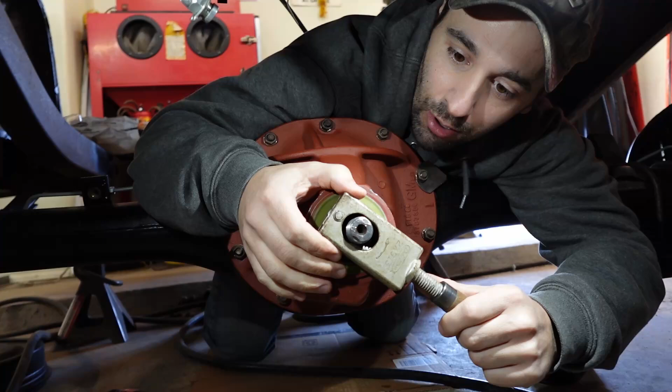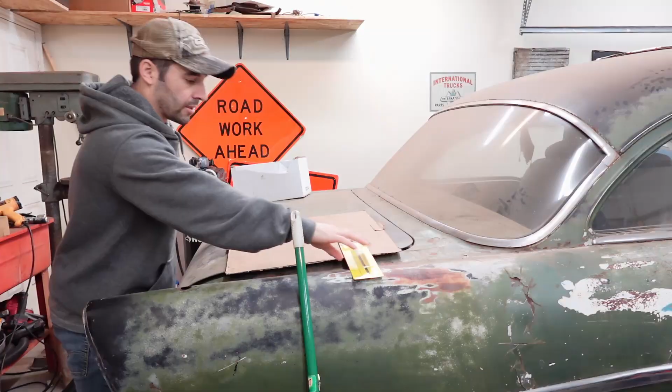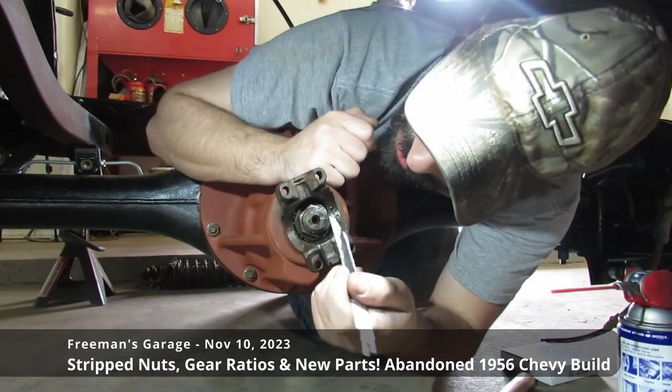We're working on the 56 Chevy again today, and I'm only concerned about doing one thing on the car today. In more than one previous video here on Freeman's Garage, we tried to fix the jacked up threads on the pinion gear on this 56 Chevy, and I think we're finally going to be able to fix it this time with this thin little hacksaw blade.

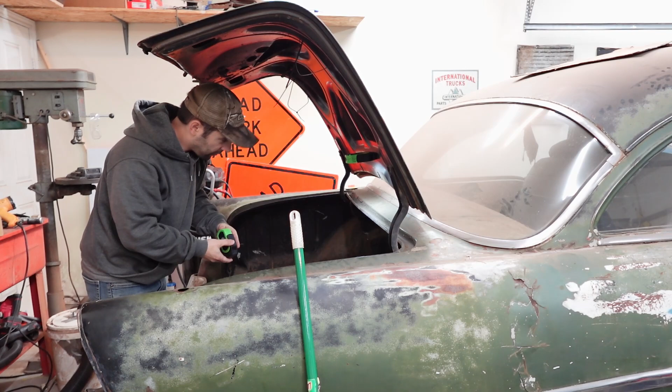Hopefully. There's multiple projects going on here at Freeman's Garage all at the same time, which can add to the confusion and chaos of getting things done, sourcing parts, and keeping things in order. And on top of all that, I take a road trip over Christmas all the way across the country and back.

And of course I just can't help myself. I end up in the swap meets and the estate sales, and I'm buying things. I really did need the kitchen cabinets for Freeman's Garage. I really did need those. I can't help it, I'm a collector.

But now on top of everything I've got going on at once, I've added in sorting through and organizing all the junk - really good items I brought home. Useful, needed, good purchases. And I'm going to be hanging cabinets and all that kind of stuff.

And so I figure, I need to keep things going, I need to keep the 56 going. I can't stop for a week or two and do all that kind of stuff. So let's take this time we have right now and get the one thing done that's really clogging things up at the moment, and fix these threads, finally get our pinion nut back on, and that will relieve - I think that'll blow up the dam and get things moving again.

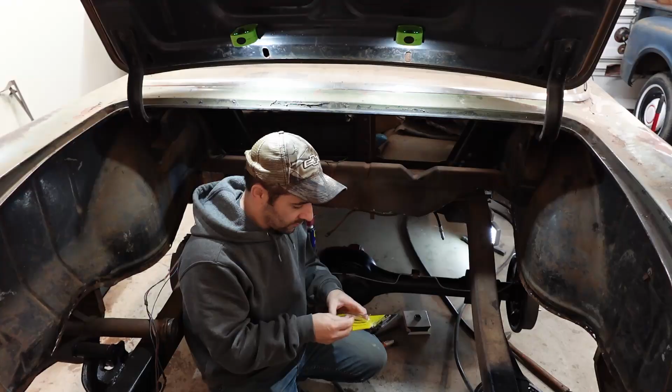So hopefully, this thin little blade is going to do the trick.

Now, where is the... here's a Sawzall blade that we were trying to use in one of the previous videos. Is this really any thinner? You'll see why we need a really thin blade here in a second, especially if you haven't seen those previous videos yet. Oh, this is a lot thinner than this Sawzall blade.

So this might do the trick. And I bought 2 packs of these blades, and they were 89 cents a pack for a 2-pack. So hopefully they don't just fall apart as soon as we start filing. Hopefully they last. All right, so here's the scene of the crime.

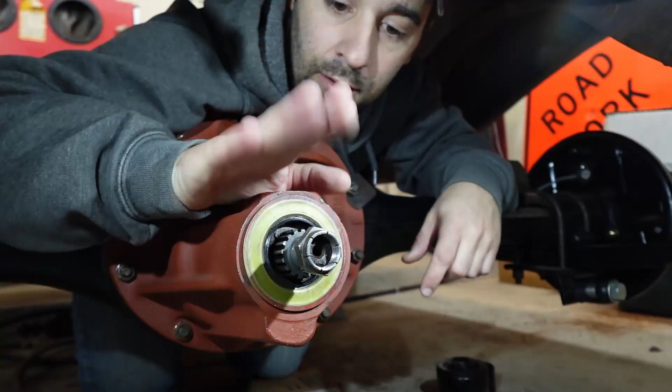If you haven't seen those previous videos yet, which I recommend you do, they are linked in the video description to watch after this. Now this is the original pinion nut, which we're hoping to use. And then this here, this is an aftermarket nut that if we need to use, we will use. And they're both a locking type nut.

And the challenge is, you see, we've been able in the previous videos to clean these threads up enough to get to this point, but then we get stuck. And I think it's because on the very end here, somebody in the past had hammered it down here and right here, I'm sure, to make sure the pinion nut could not come off, but it's causing us issues now.

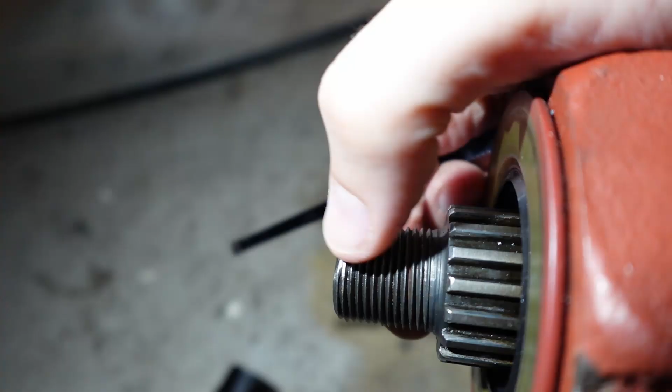Watching those previous 2 videos will give you the full background on how we got to this point here. We've used an actual thread file to the best of our ability, but that spot right there on both sides, that's what's holding us back, man.

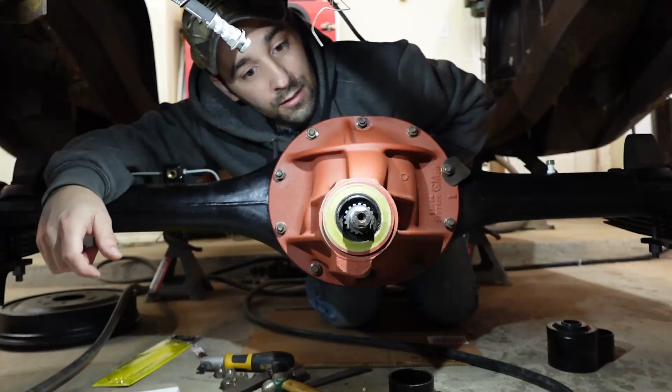I think so. If we could use this thin little file to open that up, just like all these threads are, we might be home free. And why this is such a big deal is because if we can't fix these threads finally, we're gonna have to spend a lot of money replacing parts and tearing stuff out that we've already installed.

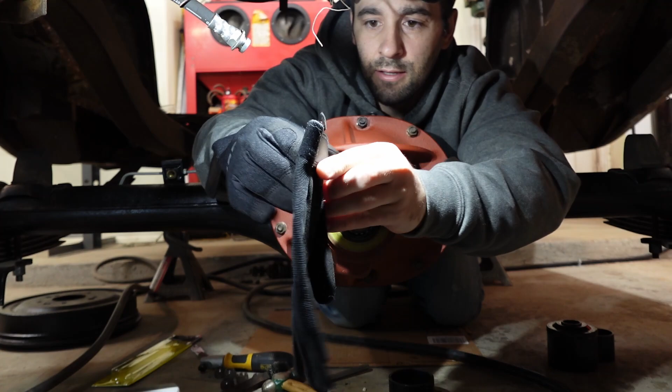Well, that's funny. I bought these gloves because I've needed to get back to wearing work gloves again so I can stop damaging my hands. But now I can't pick anything up. Okay, let's see what happens here.

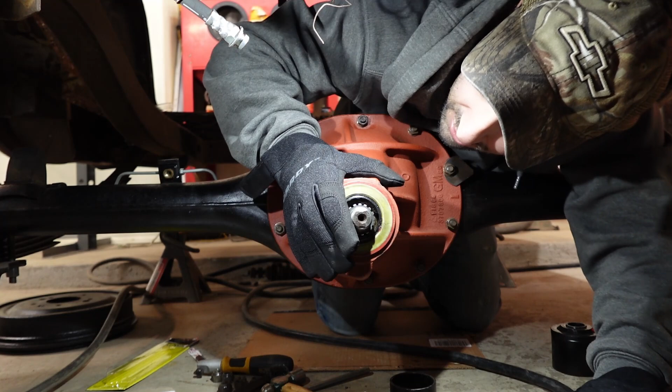Please don't just be cheap junk blades.

Huh, well we're not really cutting. This pinion might be too hard for this blade, or maybe we're just rushing into things. Maybe we just need to relax and do some filing here, just nice and slow. Although I'm a little concerned already.

Well, I knew that wasn't going to work yet. I just wanted to see if I could feel if we've made any difference.

Maybe a guy should just file the first thread or two just off of this thing. Oh, that'd be a risky proposition. But, you know, getting in and out of the bathtub is also a risky proposition.

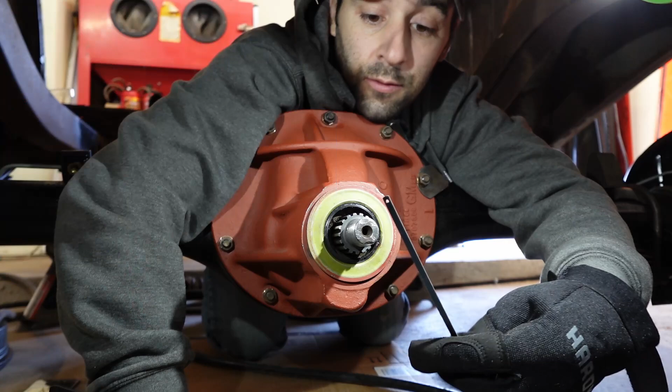Well, I've been hacking and hacking away at this thing, and this little cheap blade is not doing nothing. This is cutting, it's a little too thick though. This is filing, but not filing enough.

And the nut, we're a little, it's a little bit better, but still we're just not there. And this aftermarket nut, it's doing the same thing.

Okay, well, I'm having trouble getting it on. Okay, there we go, doing the same thing, threading on a bit, and then stopping. I mean, this doesn't look that bad, but I'm starting to think that it might not be the very end of this so much.

It might be more, well, it can't be the nuts. Well, I guess maybe the original one, maybe we have damaged the threads in there a little bit, but I mean the new one is the new one, man. You know what I mean?

I have something else that we can try, and I have not pulled it out of the arsenal yet because I don't think it's large enough. It's probably a 70-year-old tool, which means it's high quality. But let's dig that out and see if it's large enough, which it's not going to be most likely.

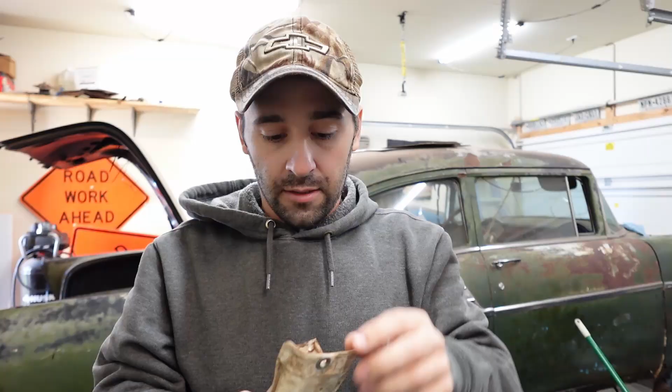Outside diameter capacity. You know, to be honest, the ring and pinion in the video when we refurbished the rear end really wasn't in the best of shape. I mean, totally usable, but I don't know, maybe we should just replace everything.

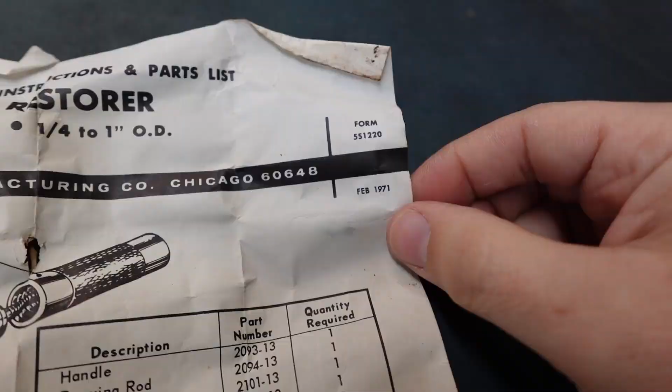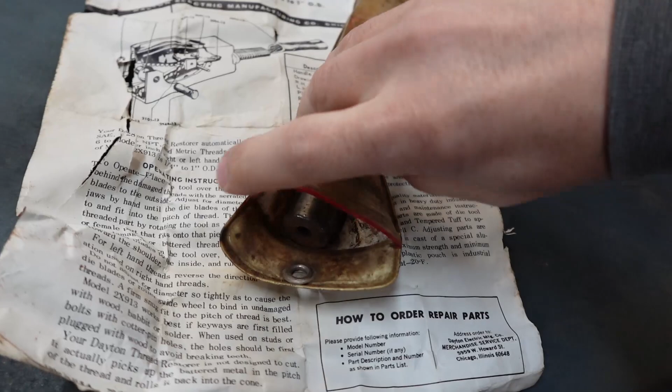Not nearly as old as I was guessing off the top of my head, or at least, well, maybe not the tool or the tool design, but this anyways is dated February '71. So that's actually pretty late, it's just barely even vintage. But before we get too deep into this, let's get the tool out so that we can find out that it's too small, and then we can move on.

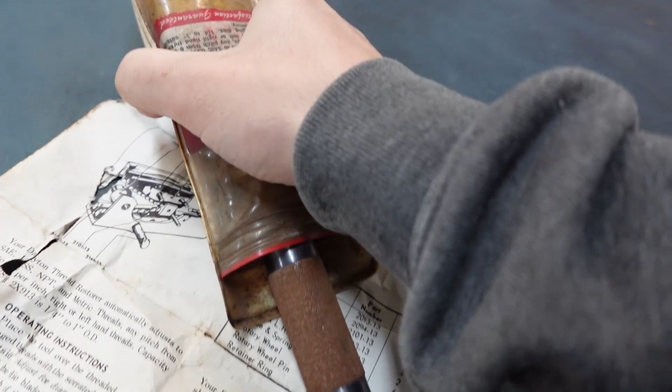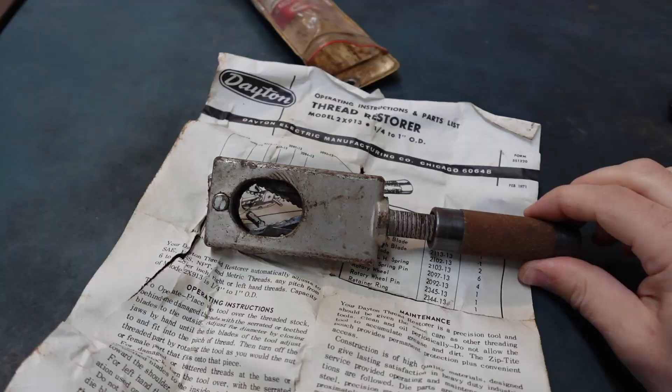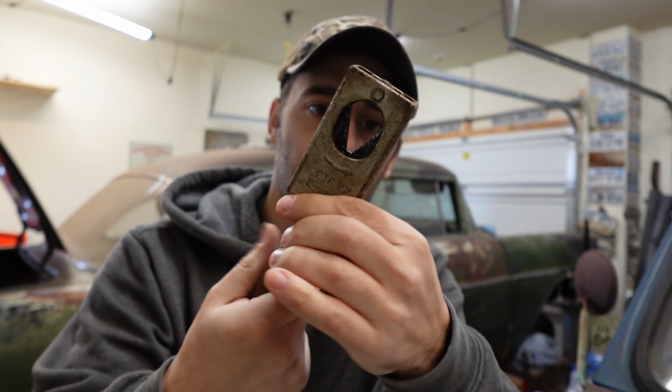This is the adjusting bit here, and as you can see, it's adjusting, that's getting smaller, and then this is getting larger. And it is, well, it's probably not going to do anything that far.

You know, I keep snagging myself on this old fuel line, but I leave it there as motivation to hurry up and get through this kind of stuff, and then we can replace it with new fuel line.

Oh, this might work. Okay, I'm glad I brought that sheet of paper, because let's read this and make sure that we don't destroy these threads. Well, you know what, I can't read in such a confined space.

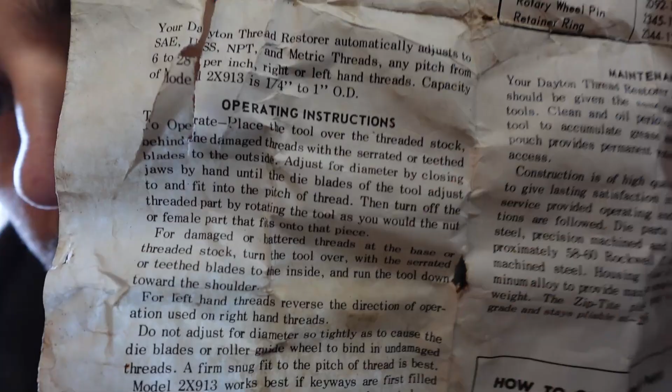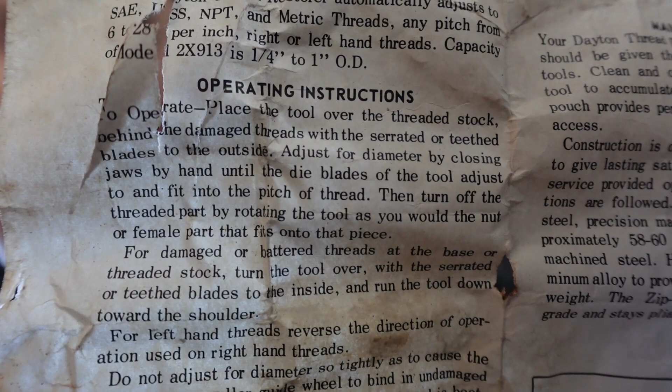Well, I can hardly read it all anyways. Operating instructions: to operate, place tool over the threaded stock behind the damaged threads with the serrated or teethed blades to the outside. Stop. Adjust for diameter by closing jaws by hand until the die blades of the tool adjust to and fit into the pitch of the thread. Stop. Then turn off the...

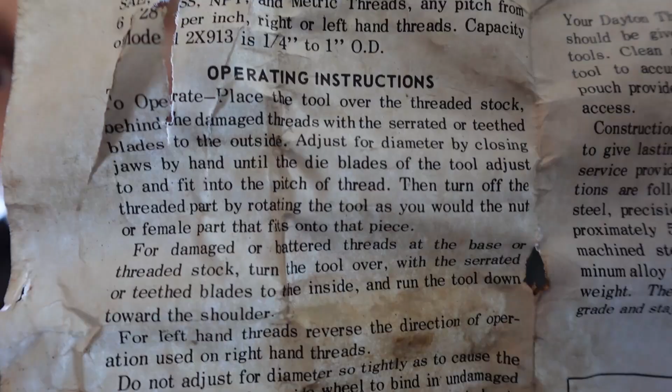Does it really say it? Then turn off the threaded part by rotating the tool as you would the nut or female part that fits onto that piece. Stop.

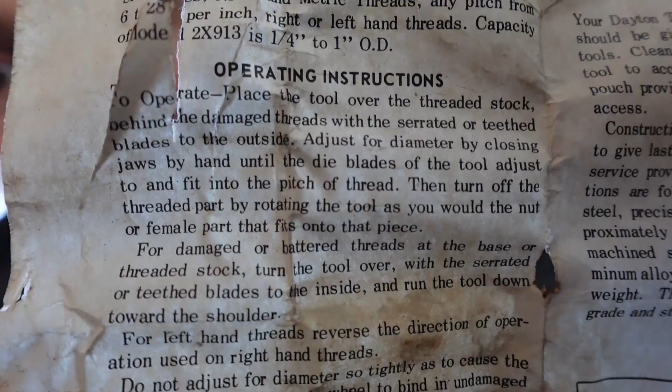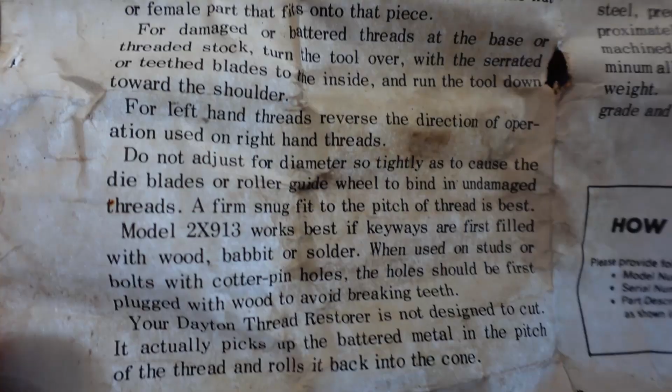For damaged or battered threads at the base of threaded stock, turn the tool over with the serrated or teethed blades to the inside and run the tool down toward the shoulder. For left hand threads - okay, that's left hand threads, doesn't matter to us. Do not adjust for diameter so tightly as to cause the die blades or roller guide wheel to bind in undamaged threads.

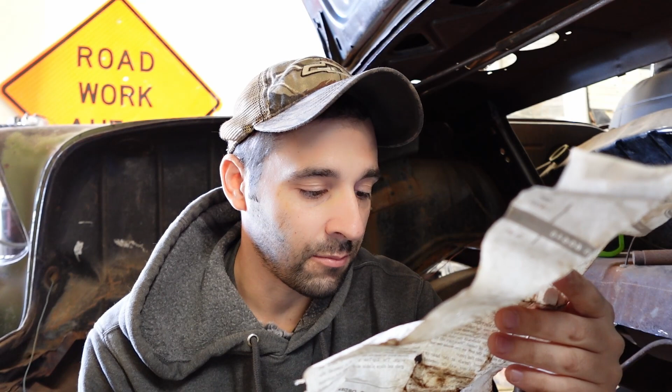I'm pretty sure I understood all that. Boy, by saying 1 inch on the packaging, I never thought that this is going to fit on here. I think we want to start a little closer to the end. I'm a little skeptical.

Okay, hold on. We need to get this pinion to not move. So, hold on. Hold the phone.

Okay, I need something to jam in the wheel studs on the driver's side now. I thought I had something down here to do that. I've got the passenger side jammed.

Okay, hopefully this works. Oh, no, go, oh! Okay, everything's falling apart that I've got the wheel studs jammed with. Hold on.

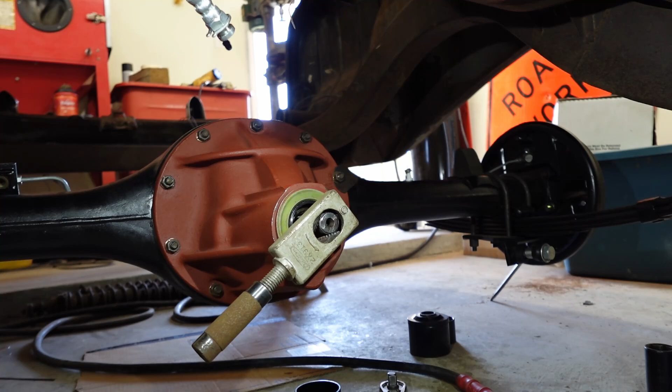Okay, daddy's back. Okay, wheel studs are jammed on both sides. Ow, alright. Let's see what happens. I thought we were jammed on both sides.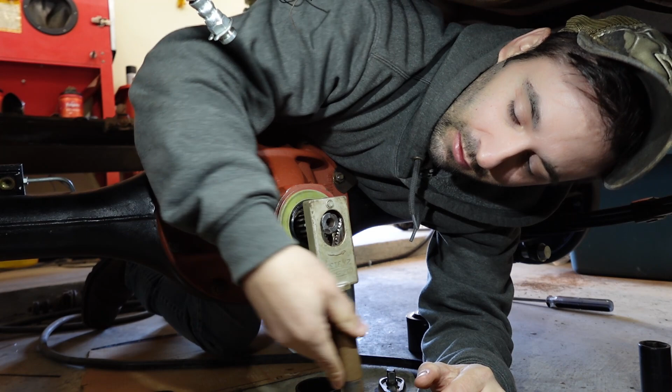Okay, hold on. What a circus. Ridiculous, I want to get this done. Alright, so we are jammed on the driver's side. Now let's re-jam on the passenger side. This is ridiculousness. Okay. Alright, Barnum and Bailey's is over.

Oh, oh, this has potential. This has great potential. Come on, oh, that is... oh, this could work. Just gotta set it up. Set it up good.

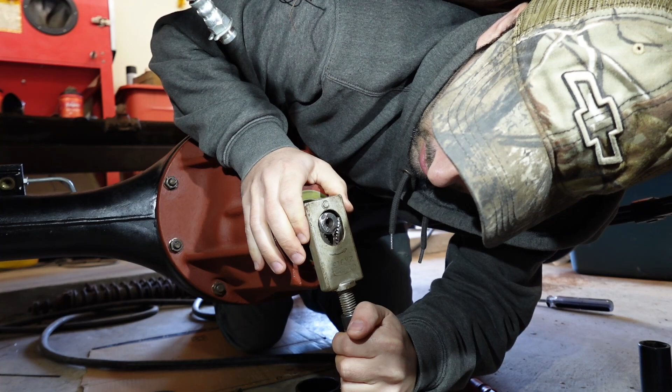Okay, I actually want to go back a couple threads. Okay, please don't ruin this. Oh yeah, oh, it's cutting alright. I might be cutting too much. I'm not sure. See, right there, just - oh, it loosened up. Right when we get to that part that was hammered down.

Okay folks, I think if this didn't do the trick, which I'm skeptical, because boy did that ever cut - we might have to just put a ring and pinion in this thing.

Boy, does this tool ever work good, though. Holy cow, is it sharp. Alright, let's try this aftermarket nut.

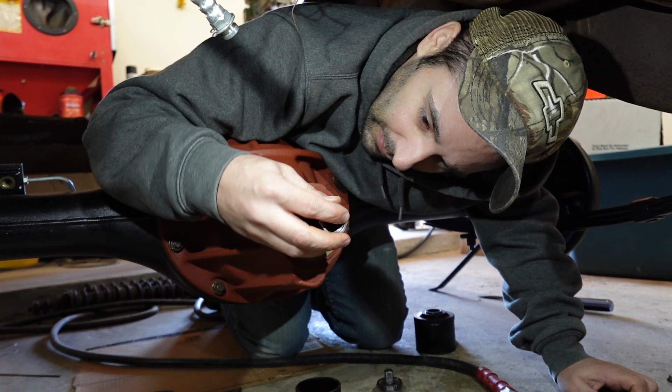Oh, oh, oh! That's way better with this one. Except for we gotta get rid of this. There's these little burrs.

Gotta get rid of these little errant burrs, if you know what I mean. I think that is better. But not good enough. That's the problemo, my man.

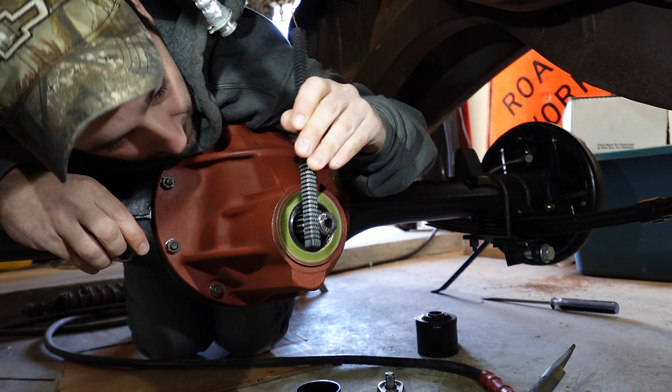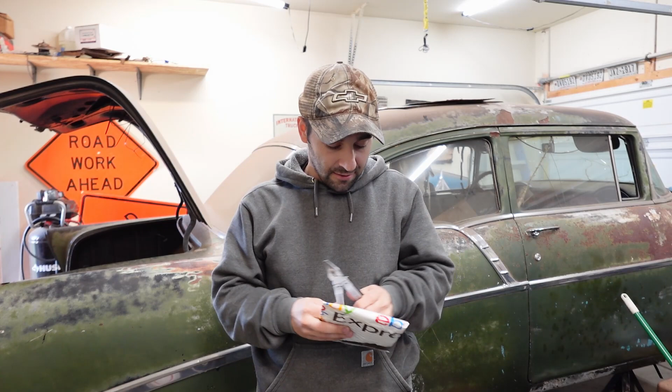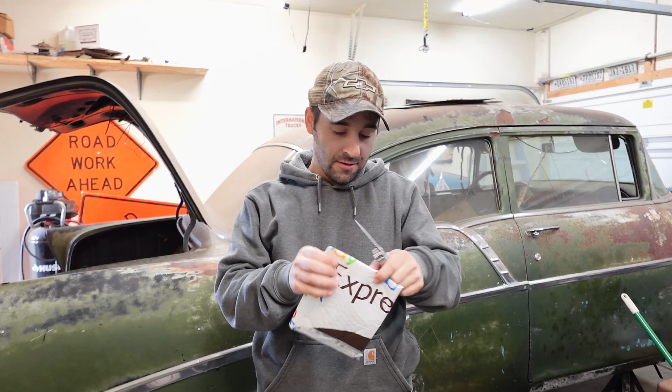I don't know, my friend. This might be a lost cause. I'm just kind of trying to clean up what we just did. Yep, this cause might be lost, and I would hate to give up, but, well, mainly because giving up would cost us hundreds of dollars. That would come right out of the floor pan fund / wheel and tire fund.

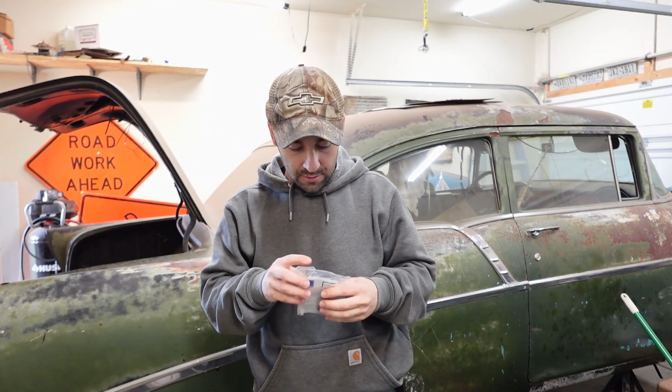But let's try this. I have another aftermarket nut here, and we will see how this gets on, because the deal with this is that I haven't messed with this one yet, so it's possible that I've damaged the original nut, the threads on the inside, and the aftermarket nut. But this aftermarket nut is impossible to be altered, and it's the exact same nut from the exact same seller.

Now, as cool as it would be to pull this out and gut it and do a new ring and pinion and do everything from scratch in there - yeah, it'd be a lot of money and it'd drag us backwards. But you know, we could go - we got 4.11s in here. We could stay 4.11, or we could use it as an opportunity to swap gear ratios or add a posi. You know what I mean? So let's see what happens if we try this.

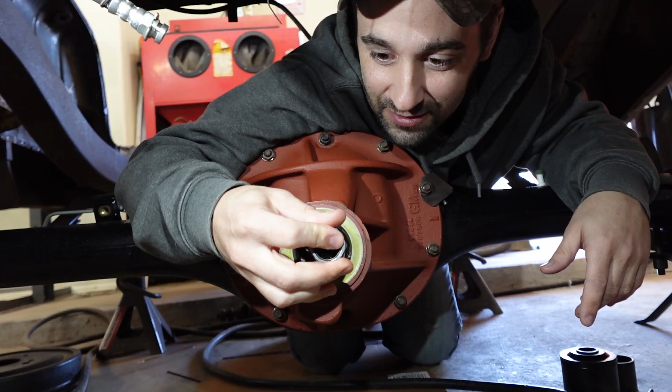We're doomed, we're doomed, we're doomed. Yeah, that's not going on. So I'm gonna put that in my pocket before I ruin it. I'll put it right back where I got it from.

And I'm gonna fight with this for a little bit longer. And then we're gonna have to make the call, because I mean we can't spend a year just goofing around with this, right? I mean, that's not... we gotta move on, you know what I mean?

Now you see, I've even thought about, well, we get to here, so let's just force it. And if we jack the threads up in the nut or whatever, as long as if we hammer the nut down and take it off, as long as it will thread back on tight, then who cares, right? Which - that's not the way to do things. But that thought has crossed my mind, but that's not even working anyways because the nut will only go so far.

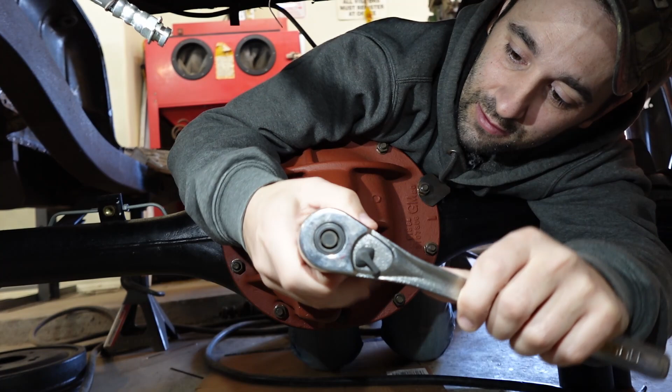I say that because, watch, we'll use this 1/2 inch drive ratchet. We tried this in one of the previous videos with the impact, didn't we? And even the impact would only put the nut on so far.

See, look at that. Look how tight that is. It's that tight. And we are right here, about halfway. It's not gonna do it. Plus, if we put an impact on this again, we'll probably just damage the bearing if we haven't already.

Okay, you're not gonna believe this, but I think I got it. Unbelievable, come in here, check it out. I just kept sawing away at it and got it threaded on with some WD-40, some Whiskey Delta 40. Now let's take it off and verify that everything looks all good.

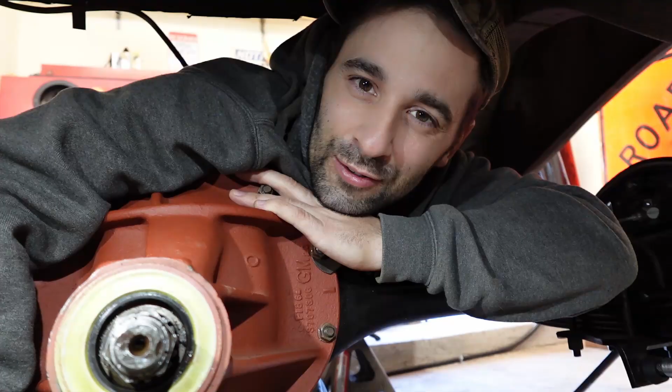Let's test fit it going back on. If that all works out, we go back and watch the previous video of Freeman's Garage where we originally took this nut off, because that's when we put this big mark here. We chiseled a mark in the nut and counted how many threads we were on because we want to get this nut back on exactly how it was.

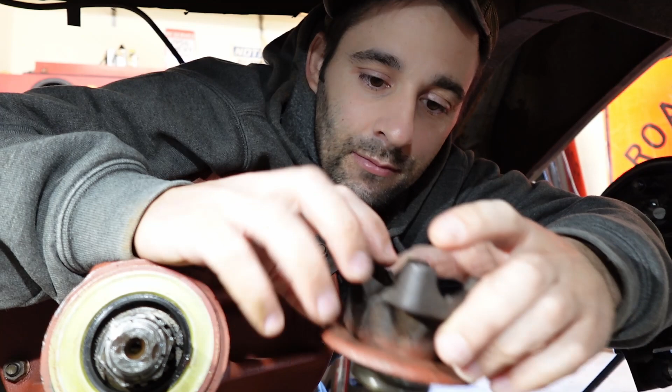We're going to put this back onto here, and the nut's got to go back on exactly how it was. That way our rear end doesn't blow up on us. So let's get started on this.

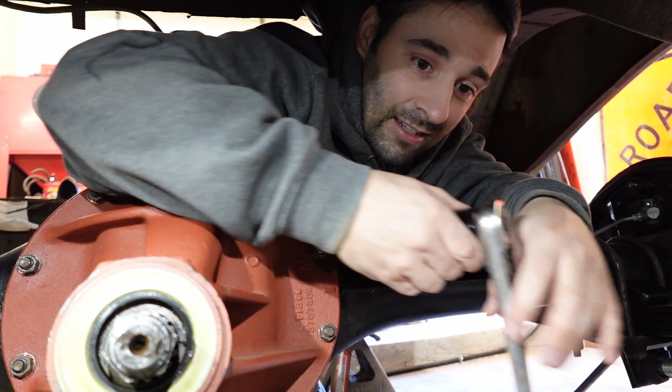You know, when things get tough, just keep going, keep filing. It's like Betty Davis said. What'd she used to say? Was it Betty Davis? Sarah, Sarah. I don't remember. Let's get this nut off. Que sera, sera. Que sera, sera, was it?

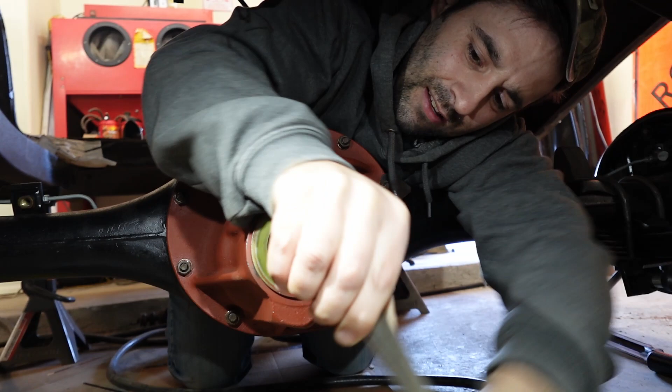That's a little concerning how tight that is. Yes, this is a lock nut, but, well, actually, that might be about right.

We are going to Loctite it too. And when we do Loctite it, if we get to that point here, which hopefully we do, because that means we're completing this job and saving money that can go towards getting the car on the road, we are going to make sure that we have all the oil off of here, all the lubricant, because the Loctite's not going to work if it's not dry. In my experience anyways.

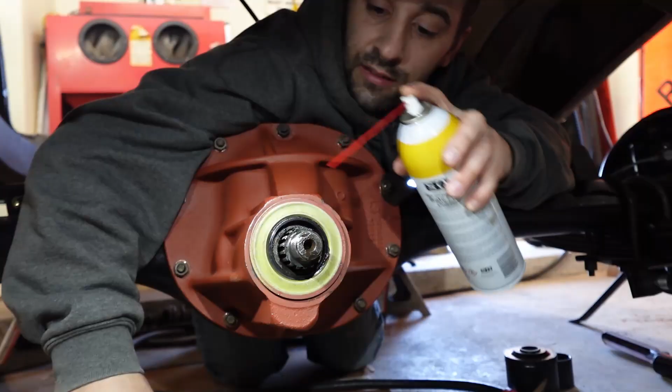Wow, we look fine. I think we did it. Let's clean this off, spray the nut out, make sure it's all clean inside.

What? How did we... Oh, you know what it must be? Hold on here, give me this ratchet back. Okay, I think what we've got now is just a little bit of a tight spot. I think. Yeah, I think that's all we're dealing with is a little bit of a tight spot.

But, you know, what would you have done in 1956 or 1960 or whatever, 59? Would you have just pulled a computer out of your pocket and ordered everything brand new on this thing called the internet, or just had a bunch of people come help you figure everything out for you? Nope, you just did what you could and then just see how it works out. So that's what we're doing.

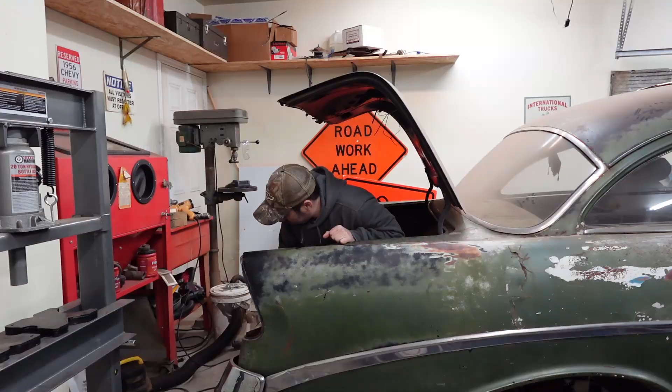All right, so now I'm going to go review the previous video where we took the nut off this thing, because I don't know where the handwritten notes are. So I'm going to do that and I'll see you in a second.

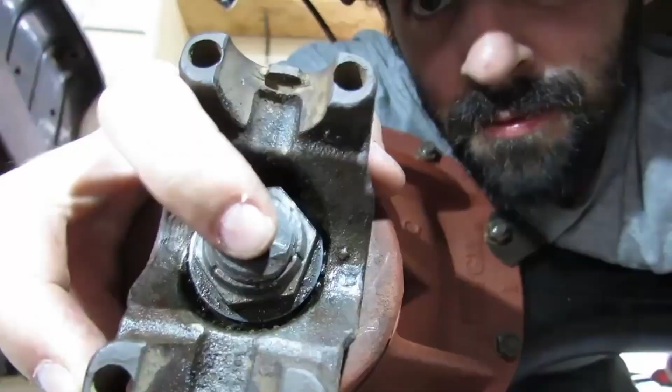All right, I'm back. I went to the Freeman's Garage YouTube channel, which you're watching right now, but I went back and found the video where we did all that. The top of the third thread is how far down the nut was. I got to see where I had made all the marks, which is good because I didn't remember all that. So now let's go back down under here and see if we can successfully button this thing up.

And in the words of Teddy Roosevelt, you don't need no credit card to ride this train. Huey Lewis. That was Huey Lewis.

All right, so let's clean out the nut real good. Oh yeah, get those vapors going in here. Yep, that's real good for you. Just let it soak in right through your skin. Oh yeah, and this is the California illegal stuff here too, so you know it works.

All right, turning the air compressor on. Teddy Roosevelt.

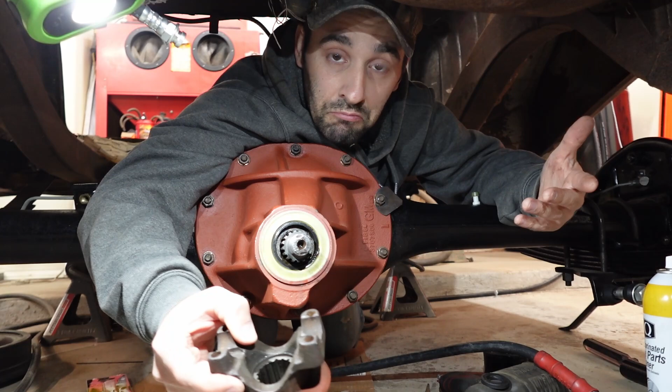Blue thread locker. Why am I using blue, you ask? Well, because blue is what I have, and it's medium strength. It's what we have, it's what we're using. We are clean and dry, no grease, so this should work out. If you're screaming at me for blue for some reason, or think I should have red on hand for these occasions, put it in the comments. Help me improve things around here. So let's put this on.

We got a scratch mark here from one of the previous videos.

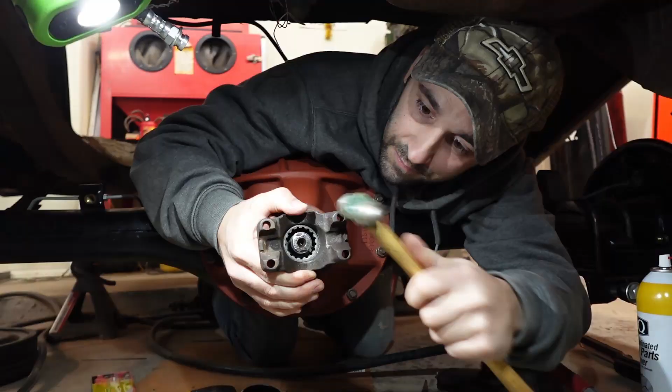Now, if this doesn't work out, oh boy, is that funny. I forgot about the washer and I accidentally knocked it with my elbow. Good thing I did that, or I might have forgotten it. I don't know if shaking this does anything, but it makes me feel good, so we'll do it. You know, a little bit goes a long way with thread lock, but we're going to use more than we need.

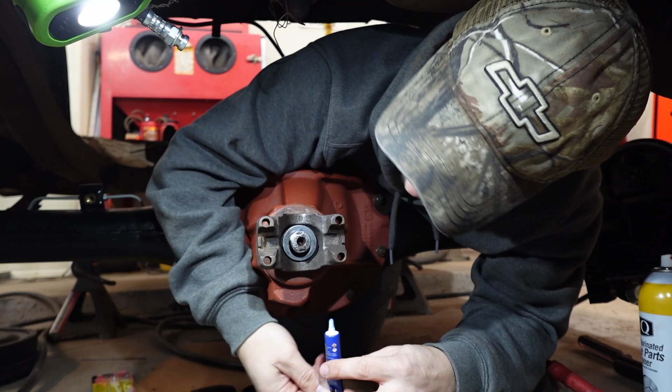Okay, that's probably way too much actually. Okay, here we go.

Oh, that's so funny. Gosh. Oh, I can't wait till this part's over, honestly, tired of acting like a fool. But it's gonna be good, it's gonna be great, it's gonna work out. It's gonna be fan-diddly-tastic. Oh yeah, everything's going just right. Just keep going good like this. Oh, beautiful. Beautiful. Couldn't be more beautiful.

Okay, we're getting close. The trick is to not go past where we want to go. What a creative trick.

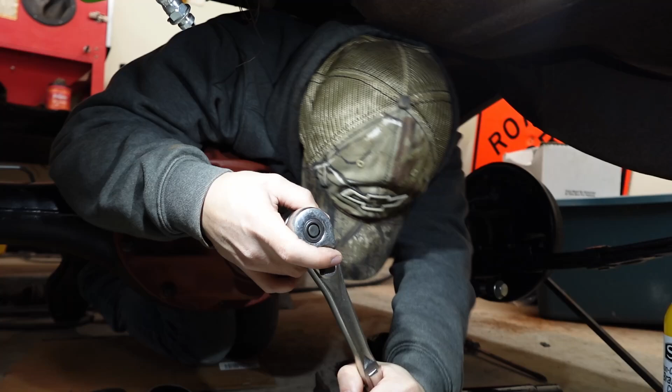Okay, we're almost there. This is going to work out, I can feel it. Okay, we're at the top of the second thread.

There's a little bit of play left in the washer, which is almost all gone now. Okay, time to start paying attention. Where's our mark?

Okay, okay. We are about to land the plane, as long as we don't mess up this last bit here. There's no slack, no space with that washer now. Okay, let's wipe off. I thought I bought brand new gloves, but of course I'm not wearing them. Okay, we are almost there.

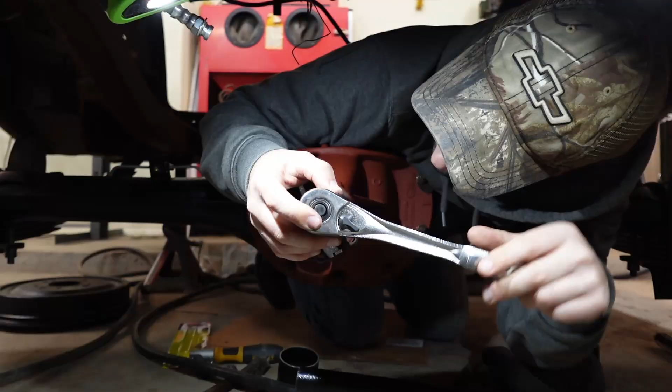Of course, it's getting hard to turn. Okay, I thought I went too far for a second, but I didn't. Just need to be careful though. Why does it feel like... Feels like I went too far now. Yeah, I gotta grab a rag.

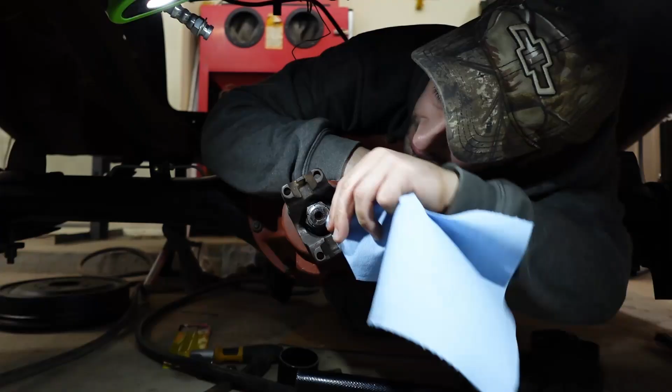Ow, stupid fuel line. Ow, almost cut my head. See the fact that it's hard to turn now? Or I'm going to need a breaker bar to turn it now. I think it's got me a little creeped out.

Thinking we went too far. But maybe not, maybe not. Just trying to wipe the dirt and whatnot off of this nut. Okay, just gotta inspect this.

I'm hoping things don't start falling apart now, because I'd really like to wrap this up and be successful and move on and be able to clean all these tools out from under here finally. Keep this 56 Chevy 210 Club Coupe / Del Ray project moving ahead. And also, I don't know what I was going to say.

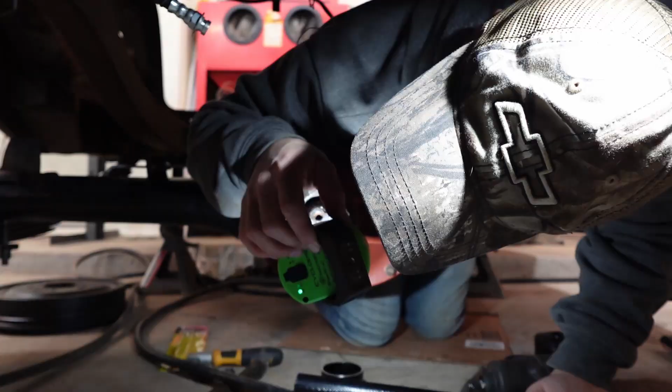Oh, wait, hold on. Oh, we did go too far. Oh yeah, we did, we did. Did we? Oh wait, we did? Why did I say, in that previous video, top of the third? Oh, okay, yeah, that makes sense. Yep, that makes sense. Okay, we need to back off.

Which means we're probably gonna have to... well, our stuff's probably gonna fall out of our wheel studs now. Maybe. Probably gonna have to redo that one more time again. Yep. Oh, it's so annoying. Well, actually, we're gonna have to do it another time too, because we gotta go back the other way.

You know, sometimes you feel like just shutting the garage down for the night, right? And just go inside, stick your feet in the foot spa, see what's going on Quincy. Yeah, well, you know what's going on Quincy. I'm telling you, this could be murder. Quincy, I'm not going along with any more of your conspiracies. But this could be murder.

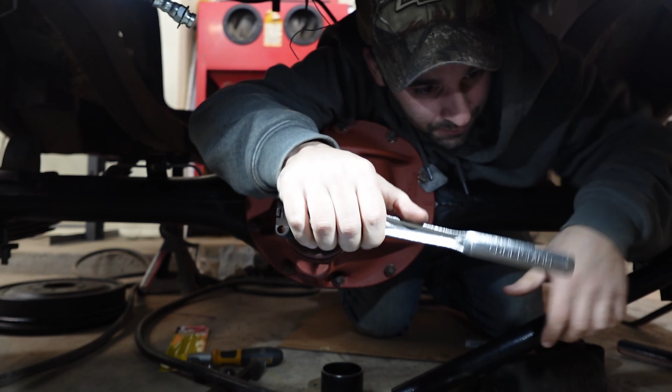Why did I do this? Why did I overdo it? I thought that I would not overdo it. Look at this, overdoing it is just, oh my gosh. Here, let's do this. Let's push down instead of pull up. How about that? How about that for an idea?

And it worked. You go back far enough so that we don't have to redo everything an extra time.

This could be murder. Oh, well, you know what? I could have done myself a favor and not set this up so it would be upside down now. But you know what, that's just what I do. Which is kind of stupid.

Oh, we're almost there, actually. We're almost lined right up, Buttercup. Actually, I kind of want to go back further because I'd like to be tightening it when we get there. But does it matter? Well, we'll know when everything flies apart on the highway, won't we? Let's go just a camel hair more.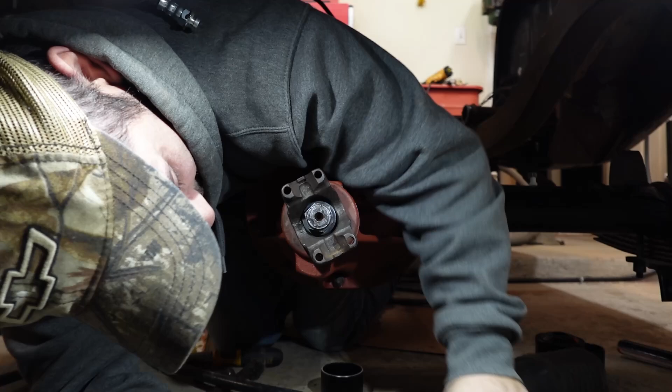But wait, is that right though? There's a little bit of play with the washer. Is that normal? I don't think that's normal. I don't think that's supposed to be like that. We might have another problem here.

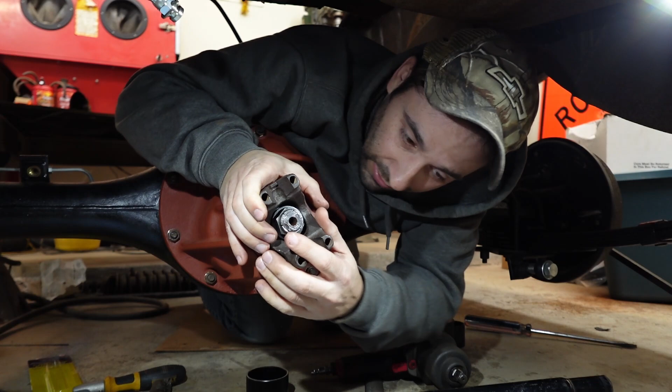Because why would we have play? Well, now that I'm looking at this at a different angle, we were not quite all the way there. Or am I just making that up in my head to make myself feel better?

But you know, this is the type of thing that a lot of people would say that, well, it's never going to work that way. You need to take everything out and do it on the workbench and redo everything, all that. Or some people might say you probably accidentally crushed the crush sleeve even more and you've gone too far, but I don't know, I don't really think so.

I mean, all we can do is test things out. Now, I did make this mark, I think, with this Sawzall blade. So I want to see, that lines up just about perfect, but there's still this little bit of play in the washer. Now I'm trying to decide if I should leave this.

There's a little bit of slop here. Should I just leave this alone, and then when we drive the car, we'll feel for a vibration, listen for noise? And if it needs to be tightened up a little bit more, we can. Because it's right where it was when we took it off, if we marked everything correctly. And it's at the top of the third thread. Actually, it's just a smidge further. But if we go any more, we might overheat these bearings, you know?

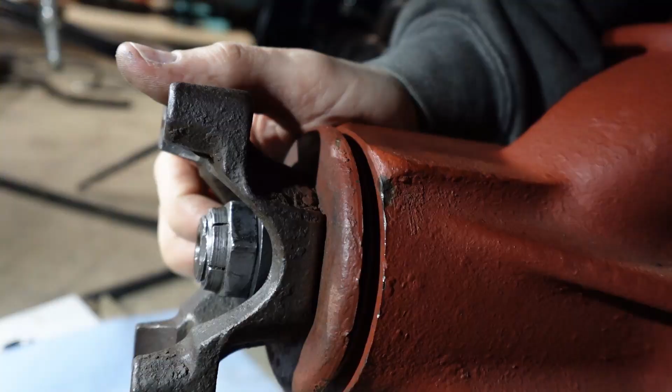It's hard to say. Here, I want you to see what I'm looking at here. So the washer there, I'm going to try to make it move. See, I can feel the play. Kind of hard to show you because I'm using one hand here. Okay, did you see that? Watch again, watch closely. Did you see that? How I moved it? But if we tighten it down any more, see, there's our marks, right there, and then there.

If we tighten this down any more though, this might be too tight. And there's a big old honker of a bearing in here. But too loose, it's gonna break apart into a million pieces and possibly crack this case, which is what we really don't want. And the thing is with something like this, there's no way of knowing, because the right way is to take everything out of the car, take it all apart, use all the proper tools, all that kind of stuff.